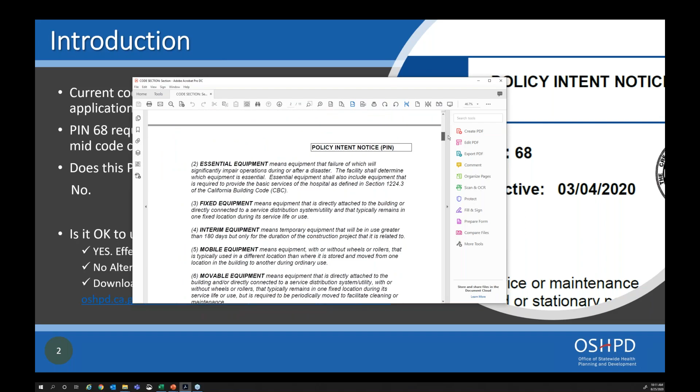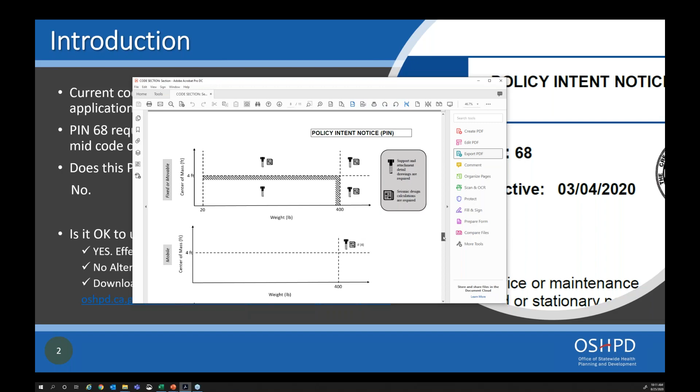So you will see the new definitions, the requirements tied to those definitions, and the explanation of each definition in detail in this PIN, as well as—let me go all the way to the end—there are charts and graphs. So in today's presentation, I will be showing a bunch of these things. The presentation covers all these figures.

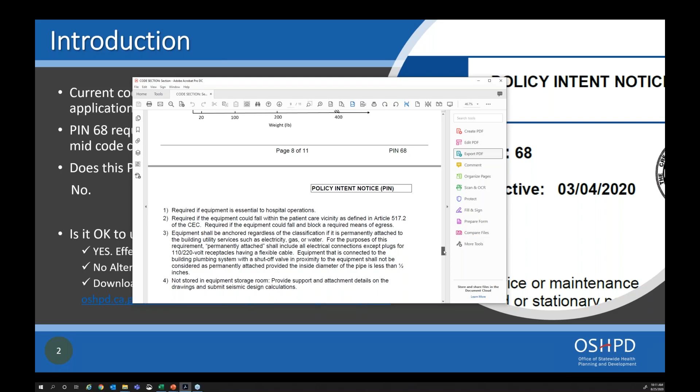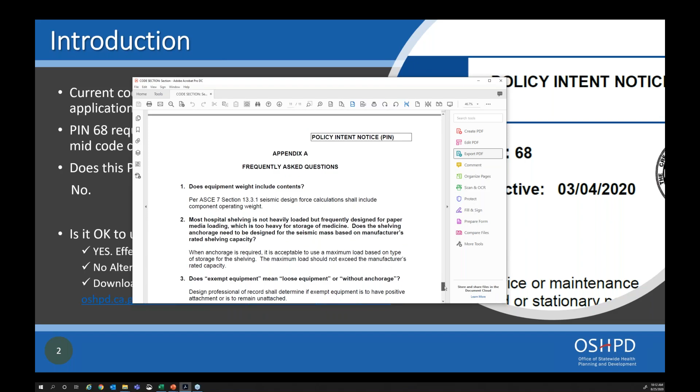This presentation does not show anything else, so everything in the presentation is actually in this PIN. Also, the example equipment schedule, as well as the frequently asked questions that I will explain more in this presentation, is also at the last page. So this is the structure of the PIN.

Now, just jumping right into the classifications, this PIN brings in new classifications. Let me first read them: fixed, movable, mobile, countertop, other, temporary, and interim. You are familiar with fixed, movable, mobile, and temporary. In order to holistically approach the equipment issue, we first revisited the definitions of fixed, movable, and mobile, and we started carving out the definition and scope into countertop, other, interim, and temporary.

I will not touch the past definitions. This presentation only looks at the PIN. I will not attempt to explain what the old codes tried to say—we're just going to move forward.

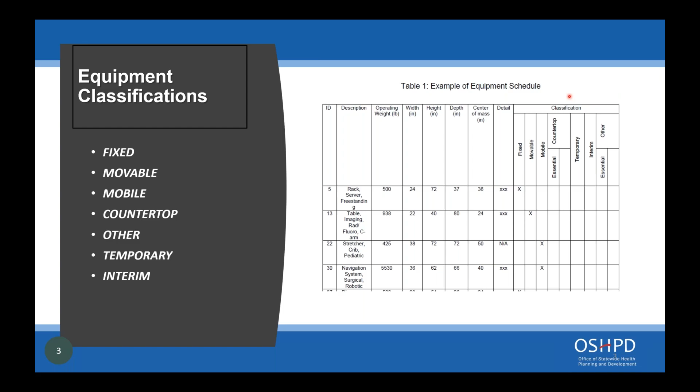As I mentioned, in the new classifications there are some more terms, such as essential and patient care vicinity. Essential is a new term, so it's basically determined by the facility in consultation with the design professional. Let me read the definition: essential equipment means equipment whose failure will significantly impair operations during or after a disaster. The facility shall determine which equipment is essential.

This is where it gets really different than any previous code cycle. Essential equipment shall also include equipment required to provide the basic services of the hospital as defined in this section. We added this sentence because, as a minimum, the equipment under basic services should be under essential. This eliminates the question—if the facility says we have nothing essential, then we're going to point out, well, at least you've got to have the basic services of the hospital covered under this essential equipment. I will come to the point of what to do with essential equipment when it comes into the picture, and when not.

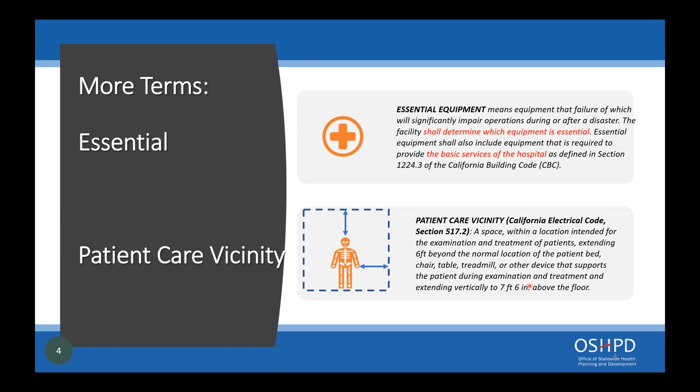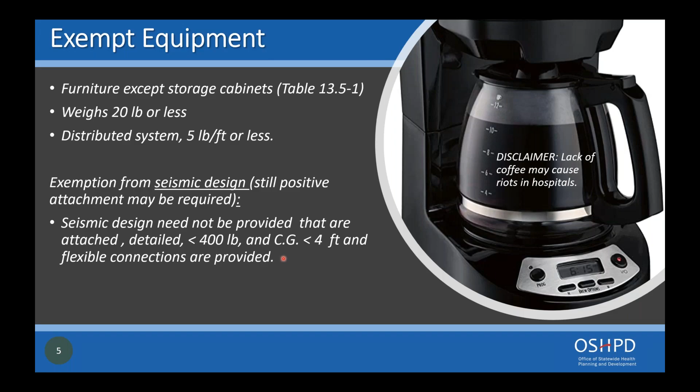The most discussed type classification is exempt equipment. We did not change the ASCE 7-16 exemption items, such as furniture or equipment 20 pounds or less, and distributed systems at 5 pounds per linear foot or less. ASCE 7-16 says these are exempt from seismic design, but you may still need positive attachment. The famous rule of less than 400 pounds and less than 4 feet high gets you out of seismic design, as long as flexible connections are provided. We haven't changed that.

PIN 68 takes this exempt equipment language one step further. If it's exempt, what do we do now? What if I show it on the drawing, or what if I don't? So if an exempt item's seismic bracing is shown on a drawing, engineering design and calculations are not required. If you identified equipment as exempt but still wanted to show it in the drawings, we're not going to ask for calculations, since it's already an exempt item.

Let's say you showed it on the drawings, but for some reason wanted to change the anchorage or change something. That change will not trigger an ACD. This is an important note: for exempt equipment, we're going to treat that as a non-material alteration.

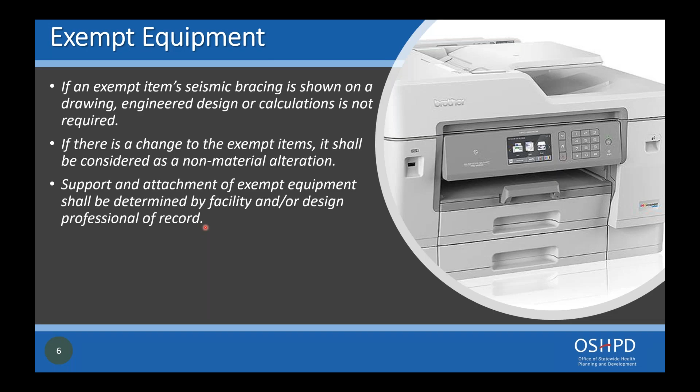If it's exempt equipment and seismic design is not required, for example, can you use Velcro? What we mentioned in PIN 68 is that support and attachment of exempt equipment shall be determined by the facility and/or the design professional of record. So if the design professional says they want to use Velcro, that's up to the design professional.

More discussion, and this is probably the most important one about exempt equipment: does exempt equipment mean loose equipment, without anchorage? This is where the positive attachment required or not required discussion comes in. We basically state that the design professional of record shall determine if exempt equipment is to have positive attachment or is to remain unattached.

Let's say you identified a printer as exempt equipment. It's on the heavier side, but it's still exempt equipment. In that case you may just say that no attachment is required, but you need to mention that.

The next question is, there are thousands of small exempt equipment items - do I have to say every single one of them is not to remain attached? We have to be practical in this area. Use this PIN when there's a disagreement between the field staff and the design professional. We are not asking you to put every 5-pound temperature measuring device on the drawings. This is just to give you direction on what to do and what is allowed.

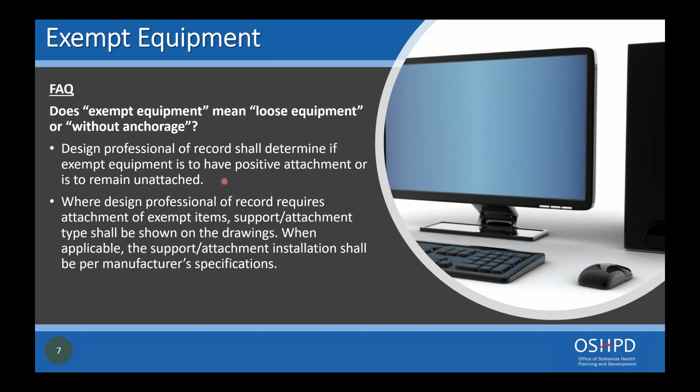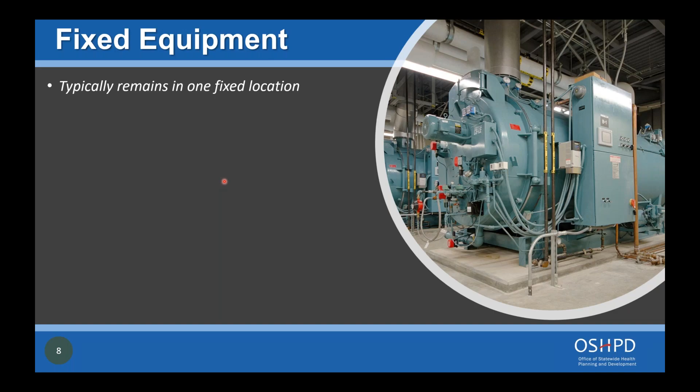We will also discuss exempt equipment within some other classifications, but I'll go through each classification and give some examples. The first one is fixed equipment - typically it remains in one fixed location. That's question number one. And it's connected to utilities - I'll be mentioning utilities quite a lot in this presentation.

We excluded equipment with plugs for 110 to 220 volt receptacles having a flexible cable or cord. Coffee machines are a prime example of equipment that is not fixed equipment, because some machines, like refrigerators, have little plastic tubes just tied into the system - we do not consider that as utilities. To make that more official, we mentioned that equipment with pipe or tubing less than half an inch with a shut-off valve is not under fixed equipment.

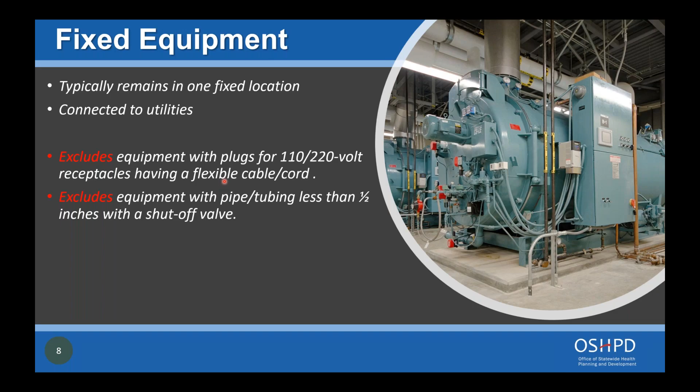So, movable. Some people when they see movable, they think mobile. So the definition of movable, we further fine-tuned it. It's essentially fixed equipment, but it's periodically moved to facilitate cleaning or maintenance.

Just like fixed equipment, this movable equipment remains in one location. It's acceptable to use reattachable anchors or restraints because you need to pull it and then put it back. So you need reattachable anchors. Obviously, you also need flexible connections, because if you are tied to a gas line, you've got to be careful.

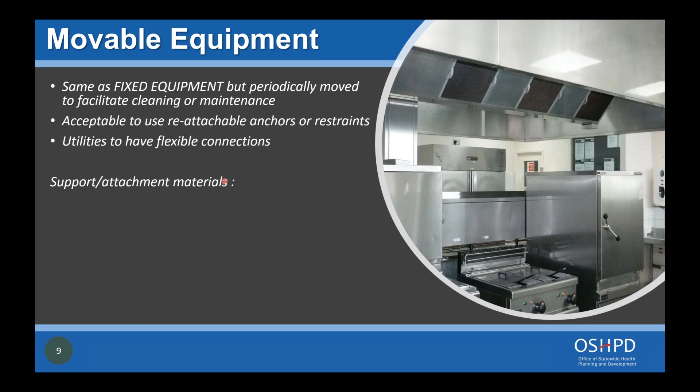On the support and attachment materials, the design professional of record can use the national standards, or you can use ICC reports, IAPMO, or similar valid evaluation service reports.

When it comes to further flexibilities, we added the evaluation of the support and attachment by testing, meaning that whatever attachment you are using, if you test it at 2 times the load, then we will call it good. So this is new.

Let's say you don't want to test the support and attachment, or testing is not practical. You may use the manufacturer's load rating from a catalog. But let's say the catalog has no documentation or background to back that value. What we're going to allow is for the DPOR to take the catalog value, divide it by 4, and compare it with the project-specific loading. In other words, 4 times the load coming from the project should match the manufacturer's catalog value.

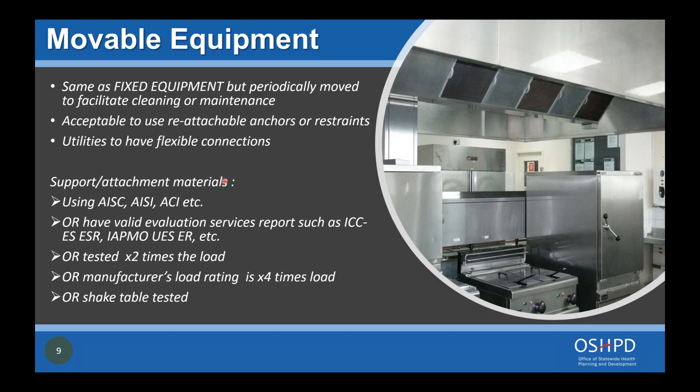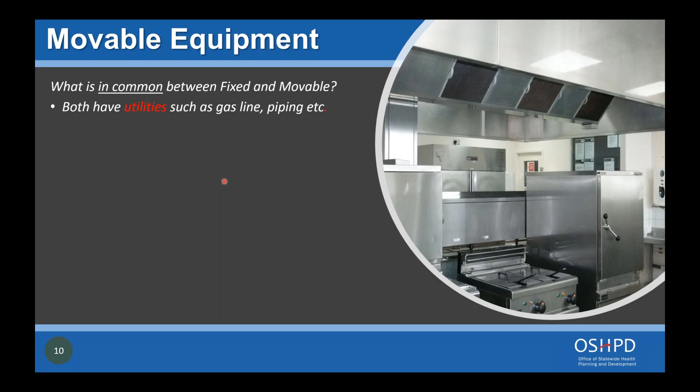So again, what's in common between fixed and movable? Both have utilities such as gas line piping. If you have a piece of lab equipment that doesn't have any water or gas or anything, that is not movable equipment, that's something else. Movable equipment has utilities in it, just like fixed, and I want to make sure there's a distinction.

Both remain in the same place. An example would be a gas stove, pulled for cleaning, for movable. And lab equipment with a 110-volt plug, periodically pulled for cleaning, is not a movable classification.

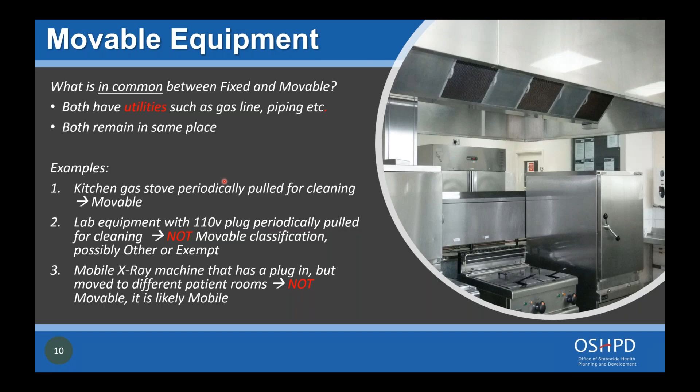We're going to come to what classification would be appropriate later. What about the mobile X-ray machine that is moved around? That is not movable, it's mobile. So there is a difference.

As I mentioned earlier, this chart is in the PIN, and a lot of people find it very helpful, so let me walk you through it. The Y-axis is center of mass, and I want to emphasize this is not height, this is center of mass. So if something is 8 feet tall and the center of mass is in the middle, that's what you're talking about. So center of mass is on the Y-axis, and weight is on the X-axis.

There are symbols that we put in. If you see a bolt, that means support and attachment detail drawings are required. If you see this document symbol, design calculations are required. If you see both, both are required.

So let's start with 20 pounds. As you know, under 20 pounds is exempt, so it's empty. Over 20 pounds, you see two different areas: under 4 feet and over 4 feet. Under 4 feet, you still need to provide support and attachment, but you don't have to provide calculations. Over 4 feet, both are required, so you need to anchor it as well as give us the calculation.

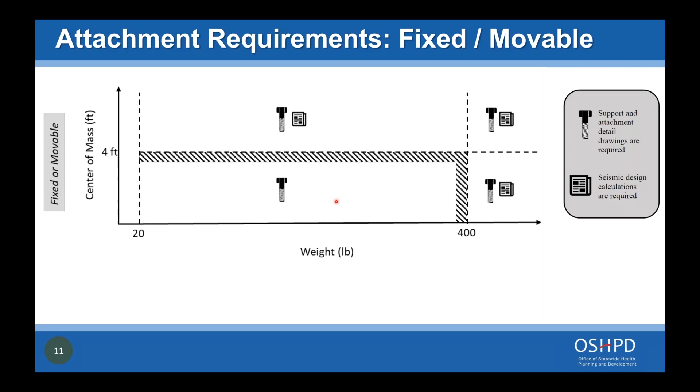Coming to mobile, the definition is equipment typically used in a different location than where it is stored, and moved from one location in the building to another during ordinary use. So if you have a piece of equipment and put rollers under it, that doesn't make it mobile. The idea is whether it's used in different locations.

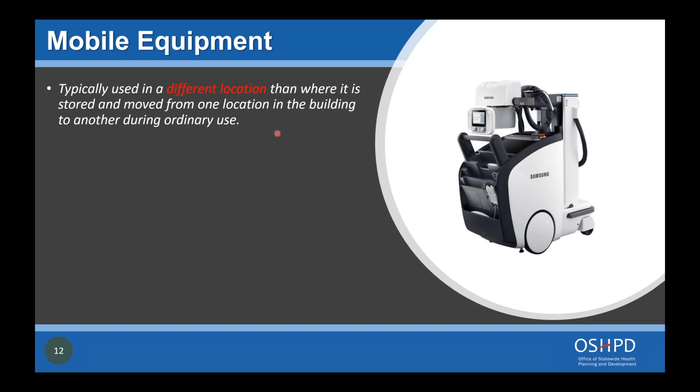One question that I get a lot is, how can we determine mobility? There was an 8-hour rule in the past, but there is none with this PIN. So the 8-hour rule is no longer there. It's not going to be enforced because it's not part of the requirement. So if for some reason this comes up in the field, is there an 8-hour rule? The answer is there is no 8-hour rule.

So coming to mobile, using the same chart, center of mass again on this, weight on that. Under 400 pounds, regardless of the center of mass, there is no requirement.

Under 4 feet, there is no requirement. If you are over 400 pounds and the center of mass is more than 4 feet, then a condition needs to be looked at.

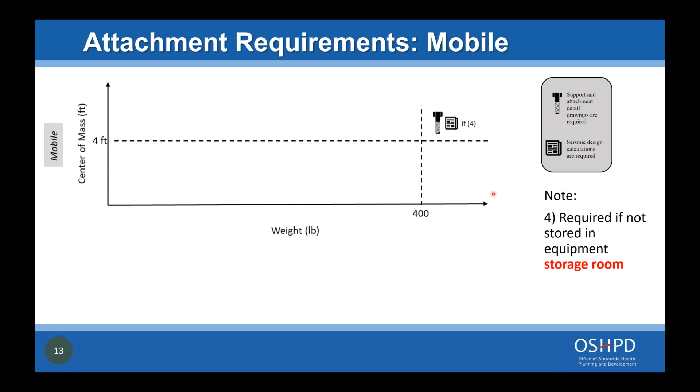I want to also note that we looked at a lot of mobile equipment. It is extremely rare to have something that is more than 400 pounds and center of mass more than 4 feet. One of the reasons is when hospital staff is pushing the equipment, if the center of mass is too high, it topples. So that's one of the reasons that a lot of mobile equipment has a low center of mass. It may be tall, but it has a low center of mass because they don't want it to topple over. So this condition may not even come into picture, but like I said, all kinds of cases can be present, but it is unlikely.

Now what you're going to hear the most about the equipment classification is other. We tried to come up with another name for other, but truly we couldn't find anything better than saying other. So first of all, the equipment that is not included under fixed, mobile, movable, countertop, or exempt items. And I will come to countertop later, but let's start with other.

Typically used at a single location, so that's key. If it is not used in a single location, then you have to put it under mobile. It is not attached to utilities, meaning no gas line or water line and things like that. The plugs are okay. So for example, a lab equipment which has a 110 volt plug, remains in one location. This is not a fixed equipment, it is other equipment.

A fourth, oh, I started hearing echo. Cesar, can you take a look? Yes, let me take a look at that. But go ahead, while I look into that, go ahead. Okay.

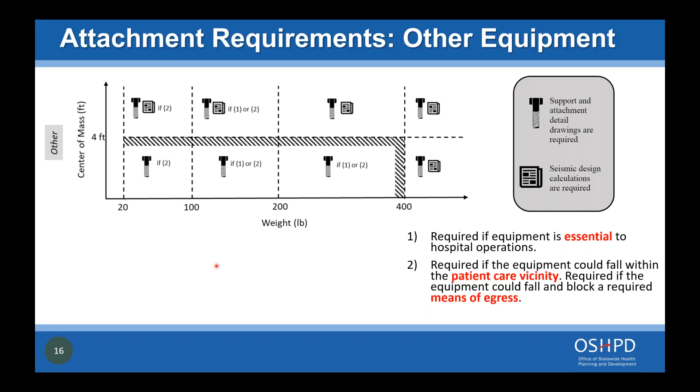Hopefully this clarifies the other equipment requirement. Countertop - countertop equipment is by far my favorite classification, because pretty much everything happens on countertop equipment. So we just provided a definition: typically remains on countertop, workbench, shelf, or support other than the floor during its service life. Being on a countertop does not get you out of the requirements for other ones, for example fixed, mobile, or other equipment. Meaning that, let's say this piece of equipment has a gas line into the wall, then you are subjected to the same requirements as fixed.

Again, you do not want any issues with the utilities. Countertop equipment has similar flexibilities in terms of reattachable anchors or restraints.

One of the most frequently asked questions is, if the countertop equipment is located on furniture, such as this, does the furniture require anchorage? The answer is yes - if you are anchoring the equipment down, then the furniture also needs to be anchored. Now, what I want to further explain is OSHPD will not look at the analysis of the furniture, meaning we're not going to be looking at all the little glues and pins and other things in the furniture. We will look at whether it is anchored down or not.

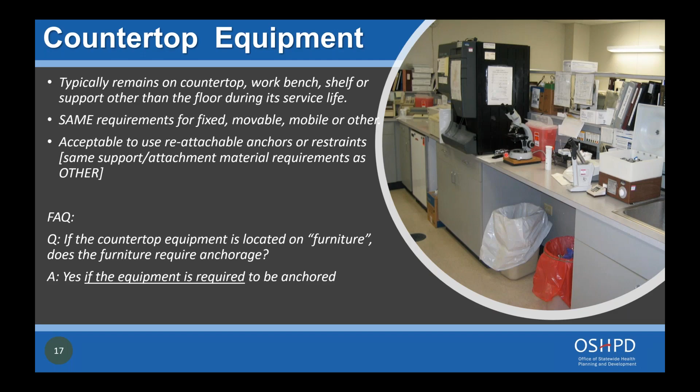Countertop - the graph is exactly the same as the other equipment. The only difference between what I showed in other and countertop is this item number 3 on these notes. Item number 3 is that anchorage is required if attached to utilities. And all other considerations - patient care vicinity, means of egress, essential - those are all the same.

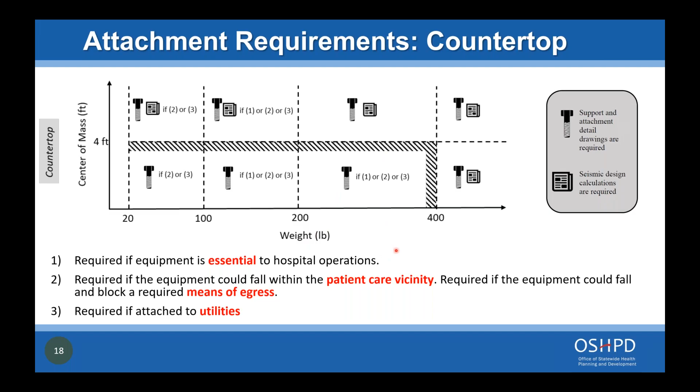Temporary equipment. This classification is not new, there was a CAN before. So with this PIN, as well as the upcoming mid-code cycle, we rolled that into the code. Again, there's no change in the definition: more than 30 days, less than 180 days is temporary.

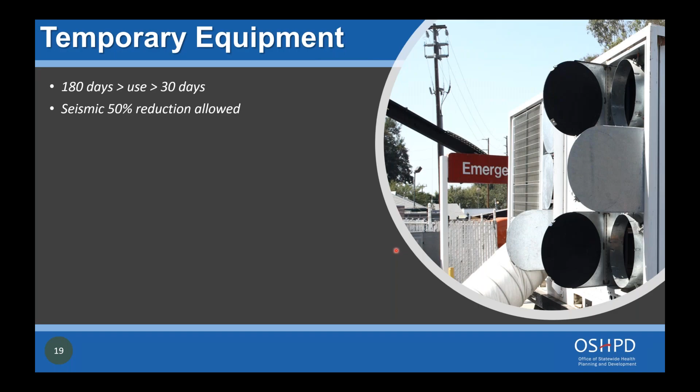Just as the CAN allowed in the past, seismic 50% reduction is allowed. What's different is we added wind speed reduction in the forces in this PIN. So ASCE 37-14, basically what it is, depending on the duration of your equipment, it allows some reduction. The longer the duration gets, the less the reduction gets.

Another difference between what was allowed in the past versus this PIN is we are accepting to use ballasts, counterweights, things like that for overturning for temporary equipment. A lot of times there's really not a good place to provide anchorage down, and you do not want to put a foundation and all that for a tiny temporary equipment. So we're going to accept the ballasts for overturning.

What about the supports and attachments coming into those temporary equipment? The seismic design is not required, and this is not new, this was in the CAN, so we did not change that. You still need to provide the gravity support and all that, but the seismic design is not required.

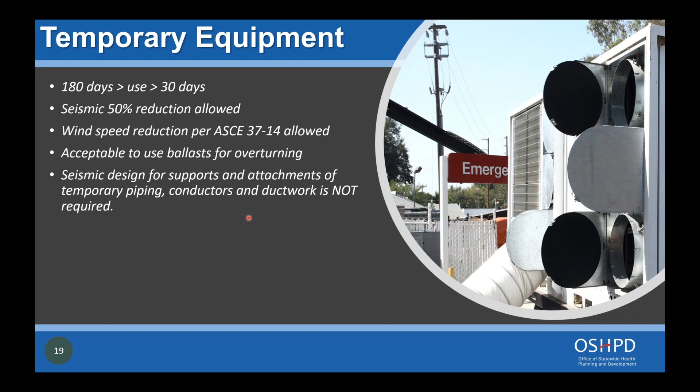Interim equipment. So this is again a new definition, really for the equipment that is used during construction. A lot of construction lasts more than 180 days, sometimes years, but the contractor needs that equipment for whatever reason. A lot of times, since it's more than 180 days, it's not under temporary, it quote unquote becomes permanent. We do not want that situation, so that's one of the reasons we introduced interim equipment.

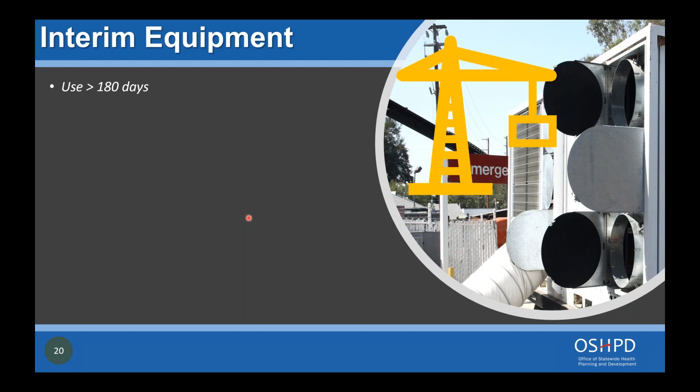It's only allowed for the duration of the construction project that it's related to. Those quote unquote long-term equipment will become not compliant right after the project is finished, so you need to do something with that equipment. We did not allow seismic reduction because this is a bit more long-term, however, we allowed wind speed reduction.

So those are the parameters for interim equipment. Similar to temporary, for the supports and attachments, we are not requiring seismic design.